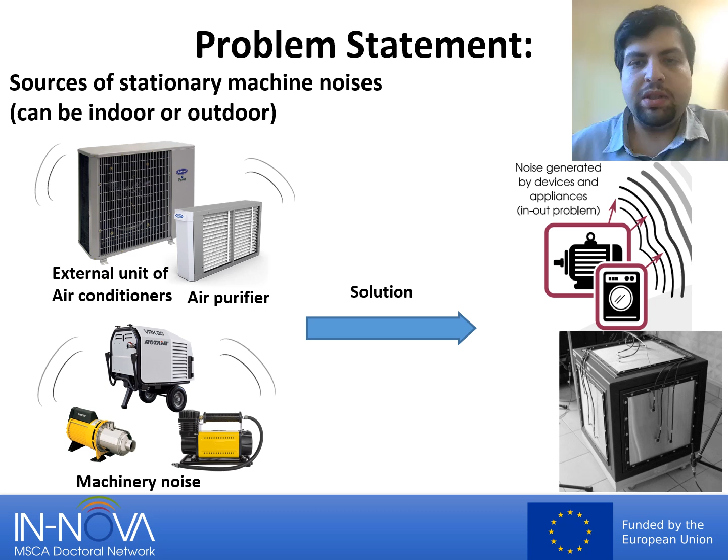Some of these devices can be designed with an encapsulated structure, such as a casing. And that casing can take the shape of a box, for example, as shown here. This can be supplemented with sets of sensors and actuators, so this can reduce the noise level of the surroundings, which is basically applying the concept of active structural acoustic control. So shortly we call it ASAC.

In this animation on the left side, this represents a noise of a machine that is placed inside the casing. This barrier here represents a plate or any plate of the casing. It has sets of structural actuators placed on it from the interior side of the plate. So basically the actuators are placed inside the casing. And outside there are sensors that capture the emitted noise that is caused by the machine itself.

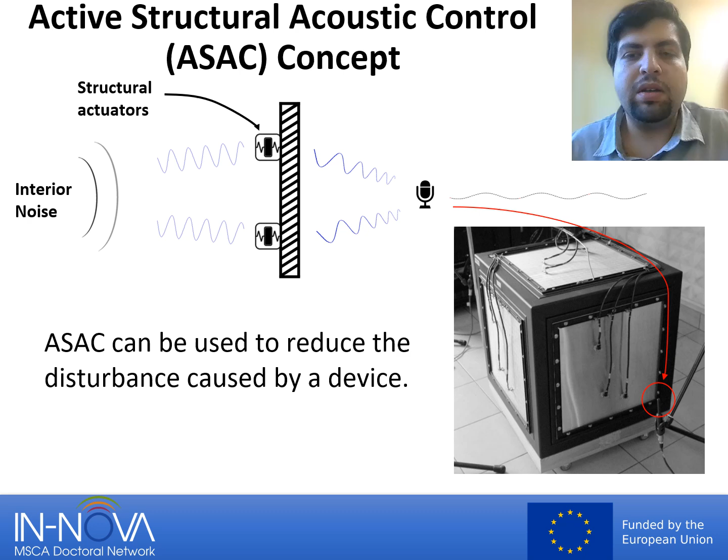Using these signals from the sensors, we can use it as a feedback signal. This way, it is possible to reduce the noise by driving the actuators using adaptive multi-channel algorithms. Since it is important to reduce the noise levels of the surroundings, as in globally, it is required to use an adaptive multi-channel algorithm for the ASAC system.

Provided here is a general description of a multi-channel feed-forward system. Considering a single noise source, one reference sensor is sufficient for the system, and the remaining sensors are feedback sensors where we want to actively reduce the noise by driving the sets of structural actuators. All the signals from the sensors are fed back into the multi-channel control system as shown here.

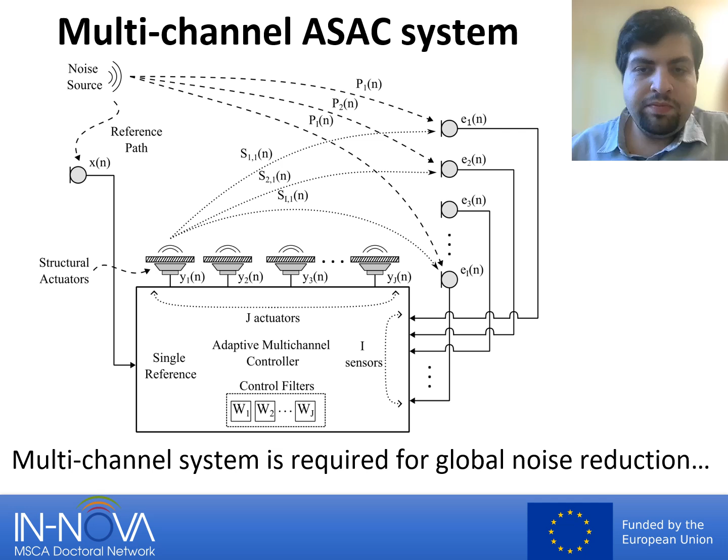So now conventionally there are three types of control system architectures. The first one is a decentralized control architecture as shown here. Here the control filters are reducing the noise independently from each other. So each control filter is using a single feedback signal. Generally, this architecture has the lowest computational requirement and can be exceptionally unstable at some frequencies of the noise due to some coupling effect.

The second architecture is a centralized control architecture. Each control filter and the multi-channel FxLMS is using multiple feedback signals, so it can reduce the noise level for each sensor simultaneously. This architecture basically increases the computational complexity of signal processing, but ultimately it makes it stable.

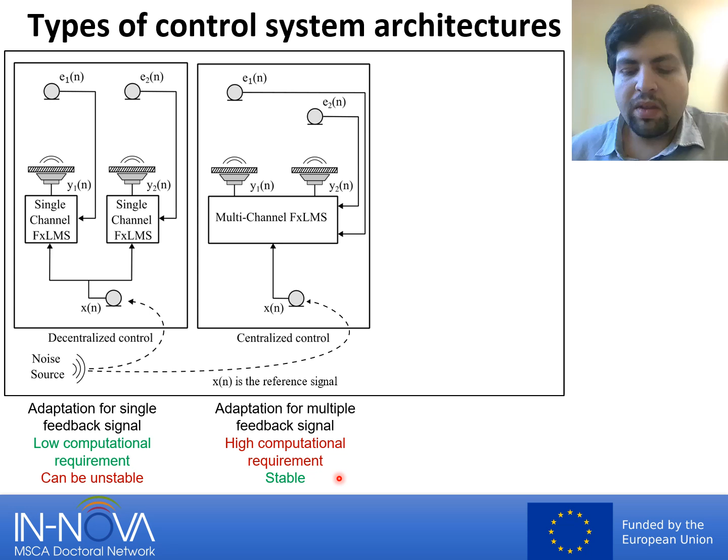The third architecture is a distributed control architecture. It's similar to the decentralized, but instead there is sharing of information between the nodes, so that each control filter can compensate the output of another. It similarly has the computational complexity of a centralized architecture, but is very stable and has similar performances.

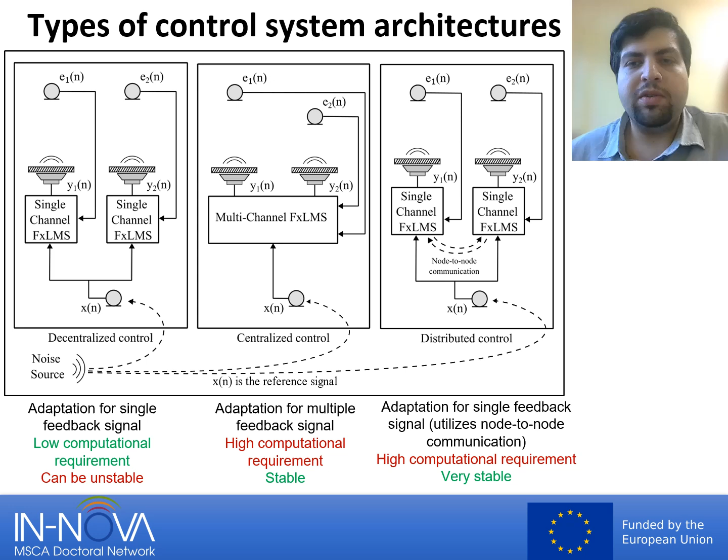So, what is the scope of my work in the project? I'll have to phrase this as a question so it can be understood easier. So, how to reduce the computational complexity of a system with minimal impact on stability and performance? I'm currently working on a numerical model of a large-scale system. I'm using a method that reduces the feedback signals required for the control algorithm.

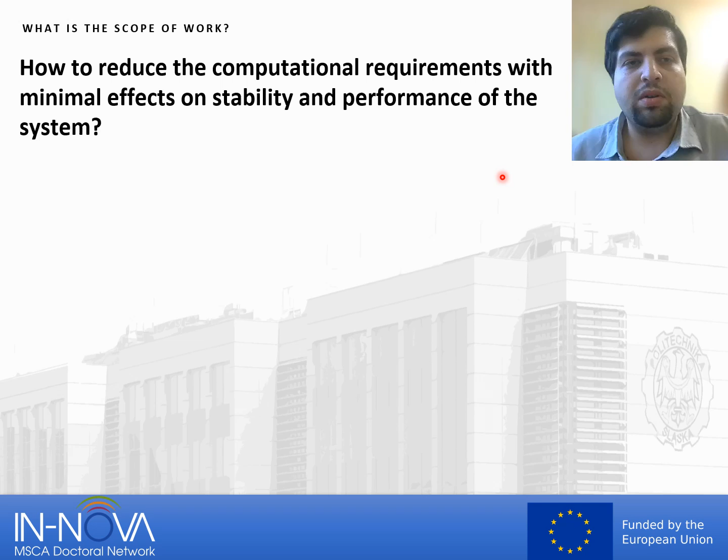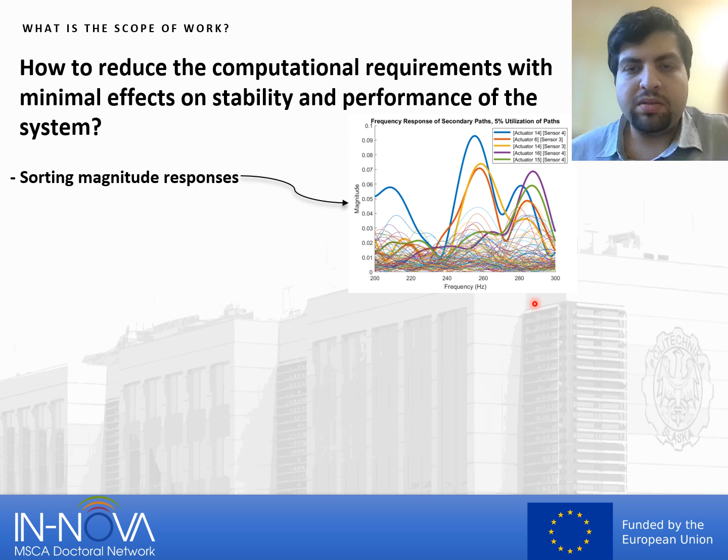This can be done by sorting magnitude responses obtained from secondary path models of a system. This method combines a mix of centralized and decentralized control filters, which basically causes a trade-off between computational complexity and stability. This can be potentially effective for large-scale systems, so speaking of when there's a higher amount of actuators used by a system.

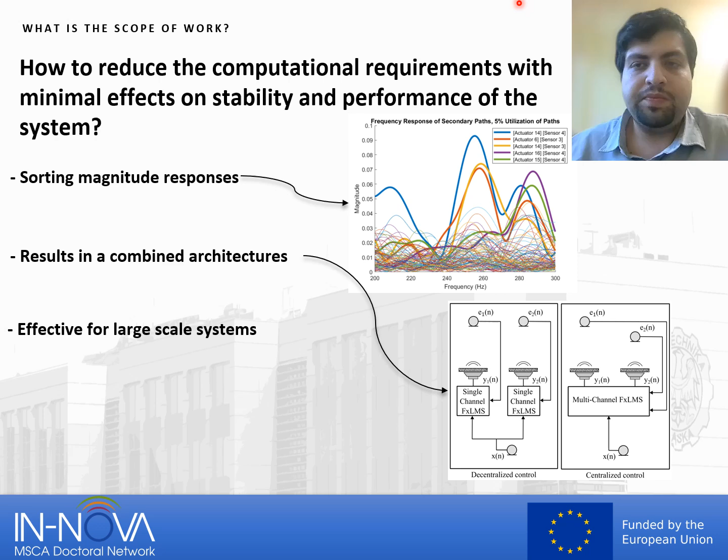The selection algorithm is currently using information from the secondary path models, but it will be reinforced with spectrum data from the noise.